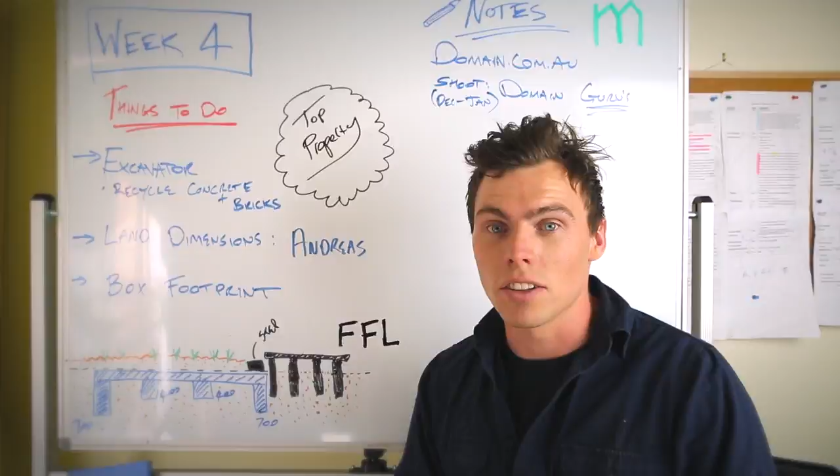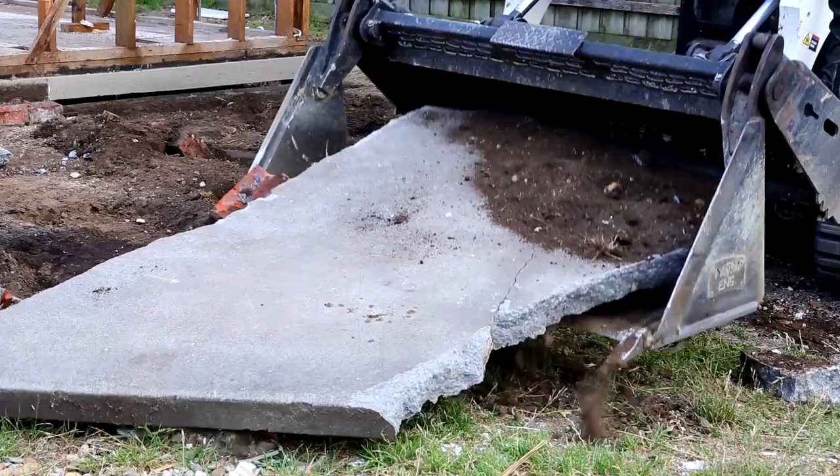This week the excavator rolled in to start levelling the land, and there was a bit of manual labour involved too. A few taps of the sledgehammer were all that were needed to help split the slabs into bite-sized pieces, and they were carried off to a recycling plant to be crushed down into road base, which I think is a lot nicer than putting it in landfill.

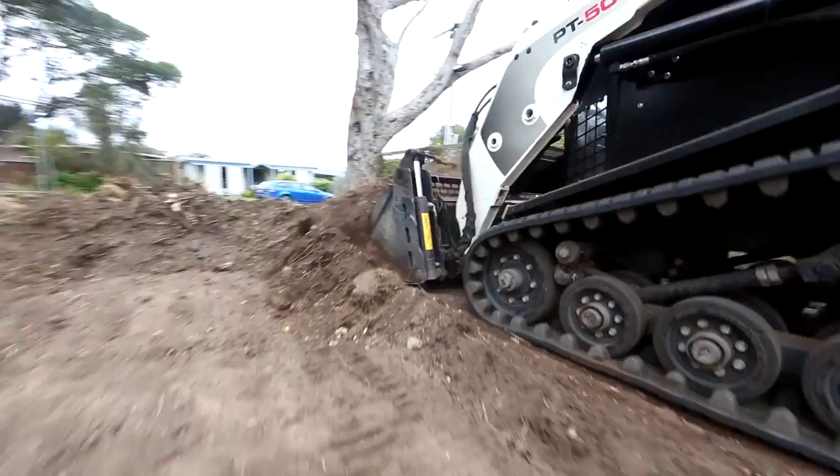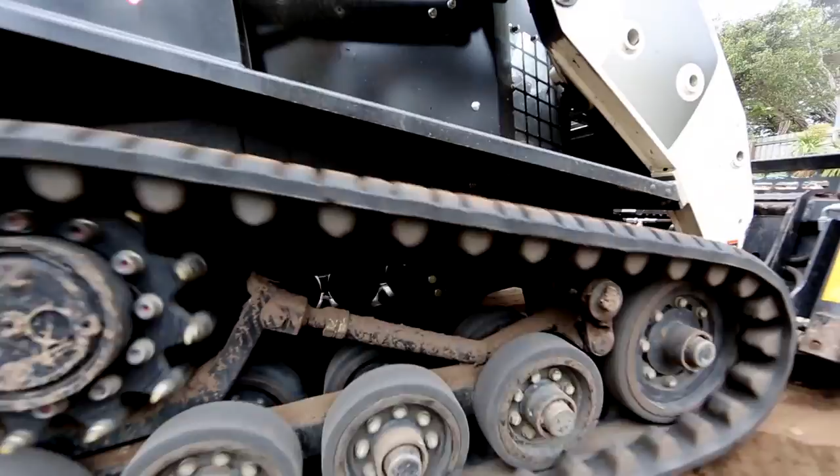Then it was time to do the all-important site cut. So the cut means that we're taking out this upper layer of really dirty soil, and it's contaminated with mulch and potting mix and grass and green waste and roots and all of that kind of stuff that accumulates over time, and it hasn't got any structural basis to it. So you pull that out and you want to get down to the juicy, fresh, clean layer of soil or sand that your home's going to sit on, which is really stable.

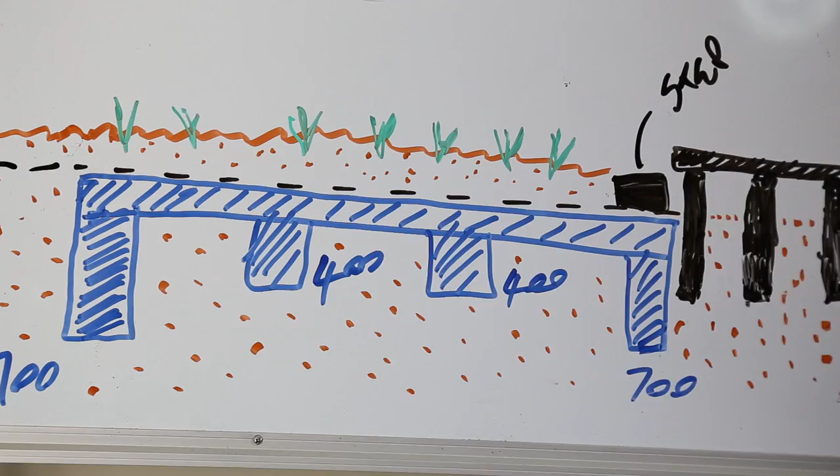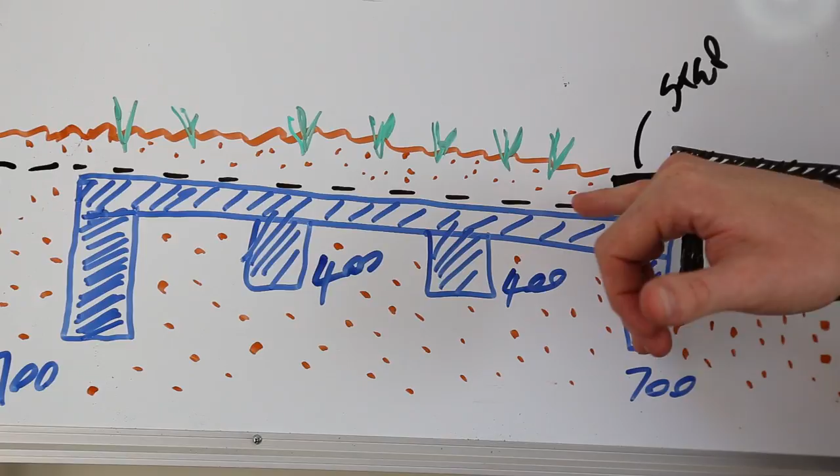So we pulled all that out there, that top layer there, and then we've had to dig down a little bit further also, about 150 mil to be precise. So we'll have our slab there, finished floor height, the black mark there, and then we'll be able to step up from our slab into the new home.

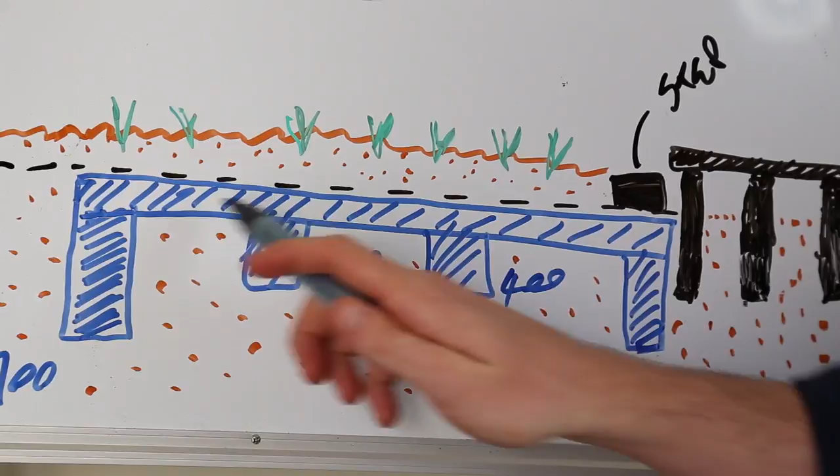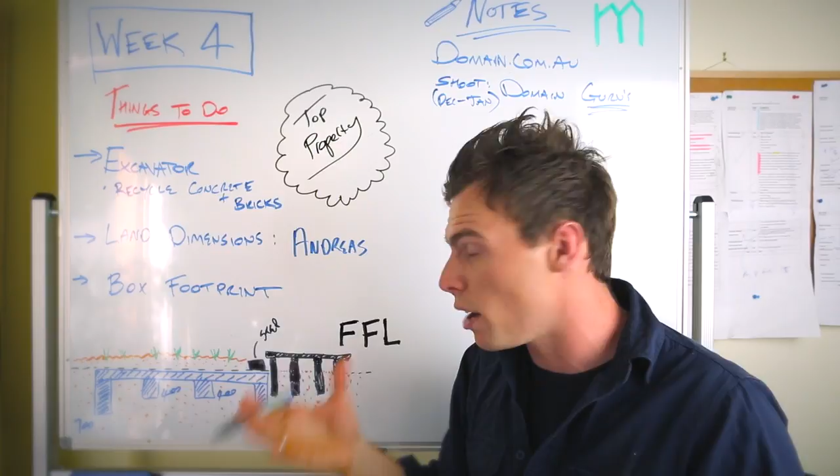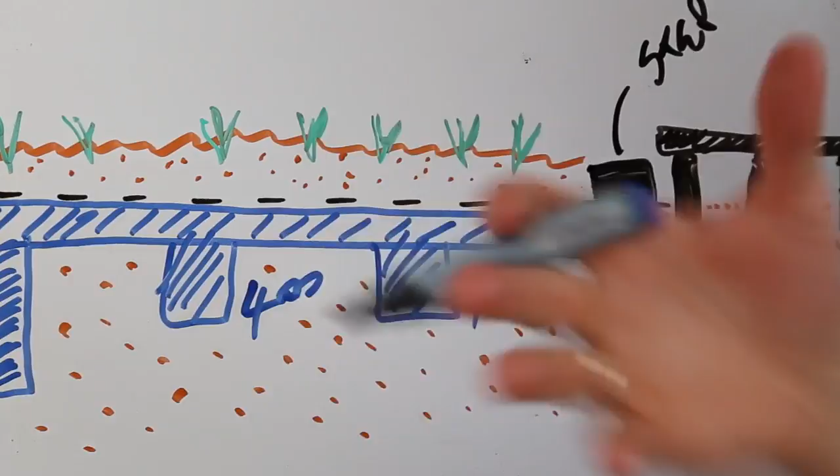So when it comes to the actual concrete structure itself, which we're going to be building out next week, the concreters are going to have to take out all of these beams and foundations as well for the home, the footings. So these footings here are going to be 700 deep, and that's basically a big trench filled with steel, reo, and also concrete as well. And that's going to go around the whole perimeter of the house, and that's where the house gets its structural support from. It's this outer edge beam of concrete and steel, which is about 700 deep, so over half a metre of just solid concrete.

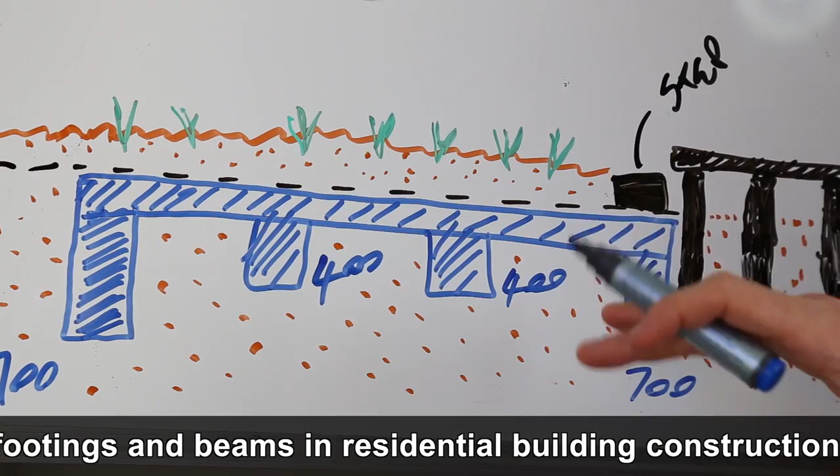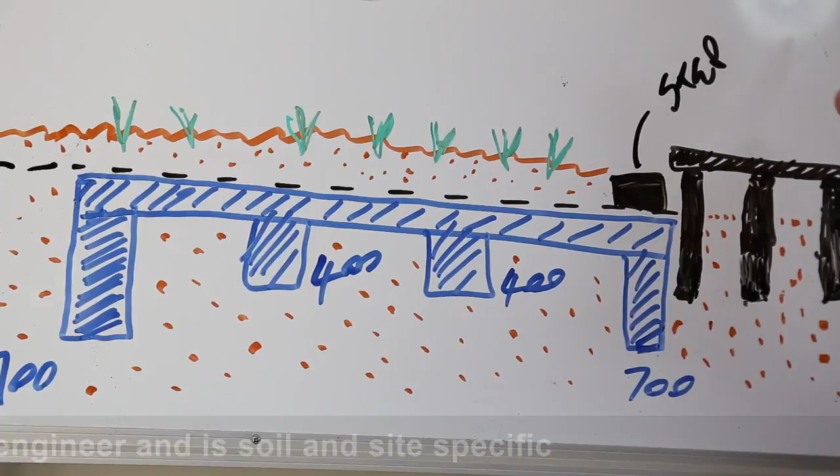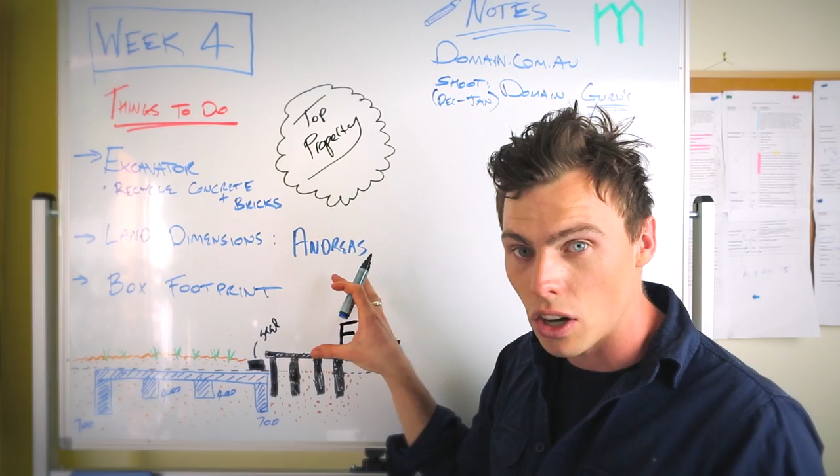Same too internally, the internal walls are supported by beams, so that's 400 mil deep, steel and concrete once again. So that's essentially what the house is sat on. It's that big concrete structure there that sits into the ground, and that concrete structure butts up against the old shack, the old footings and bearers and joists that we've got there. And the idea for the home when we're finished is you're going to be able to walk into this concrete polished area here and step up into a new living zone here, which is going to be timber as well.

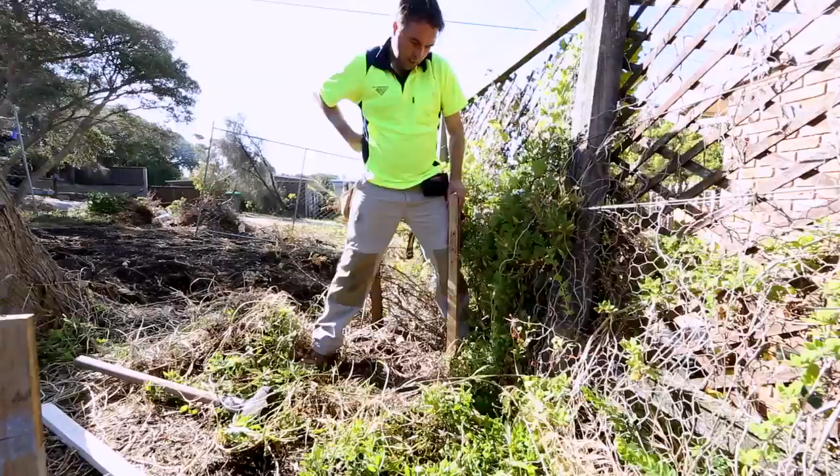I think we'll do that side first. So I'll set up a hurdle in that top corner. Lastly, we had Andreas back again from Land Dimensions to help measure out the footprint for the new home. We're building on the boundary, so we need to be millimetre perfect. And also there is a massive cost and time saving in getting a professional to help set this up, I think. Andreas is an expert and he is using GPS laser guided precision to mark out the home. So for us, having a specialist do this was very important.

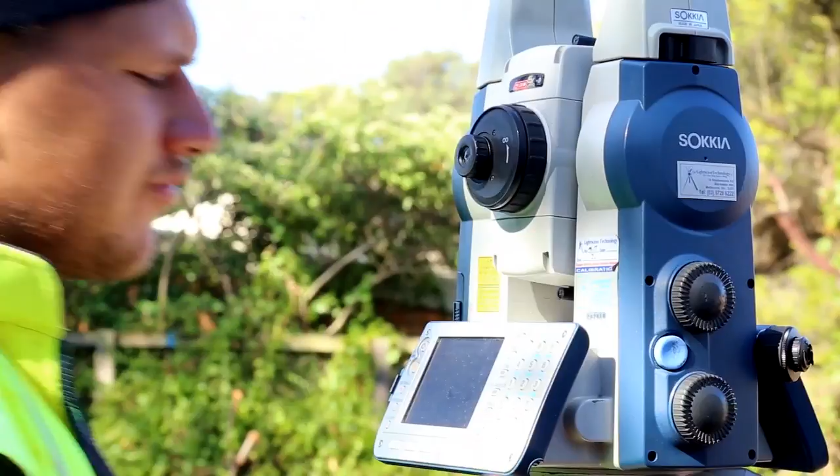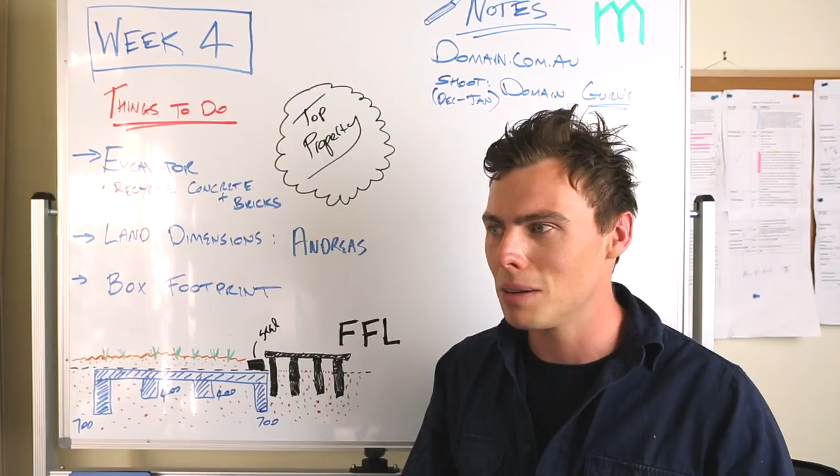Next is just the plumbing for all the pre-slab works, and then the concrete work as well. So it's all happening, and I'll see you next week.